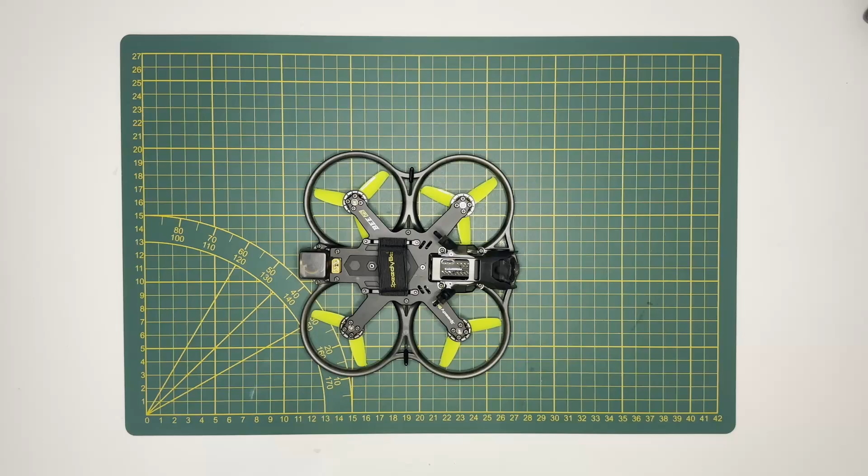Today we are looking at the Bee25 Frame Pro Kit from SpeedyBee. So let us have a look at their website. Here we can see the new Bee25 wireless tuning frame, and we have two versions, the standard version and the Pro version, and we are going to unbox the Pro version today.

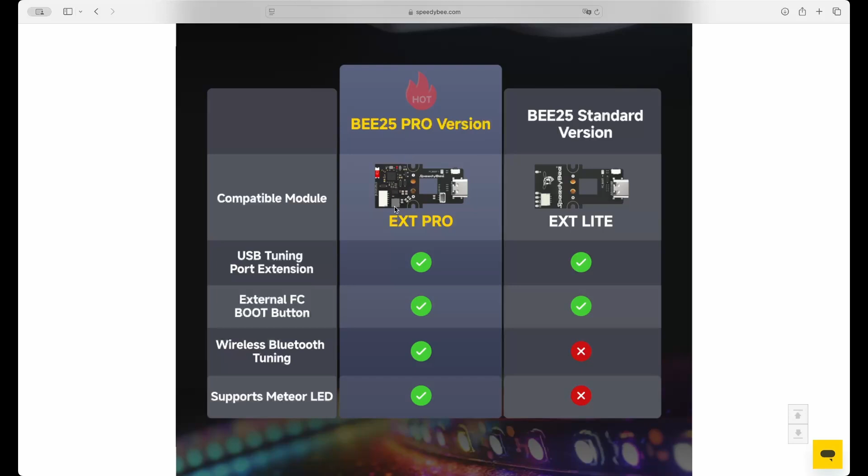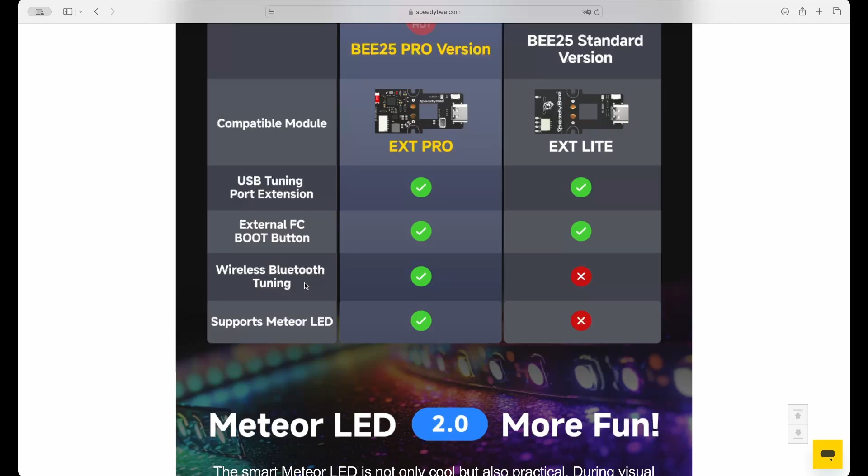As you can see, it is a 2.5-inch Cine Whoop, freestyle whoop I would say. The Pro version comes with these Pro extension boards where you can connect the Meteor LED, which comes also in the Pro set, and you have a Bluetooth chip so you can connect the app to the frame and pass through to the flight controller.

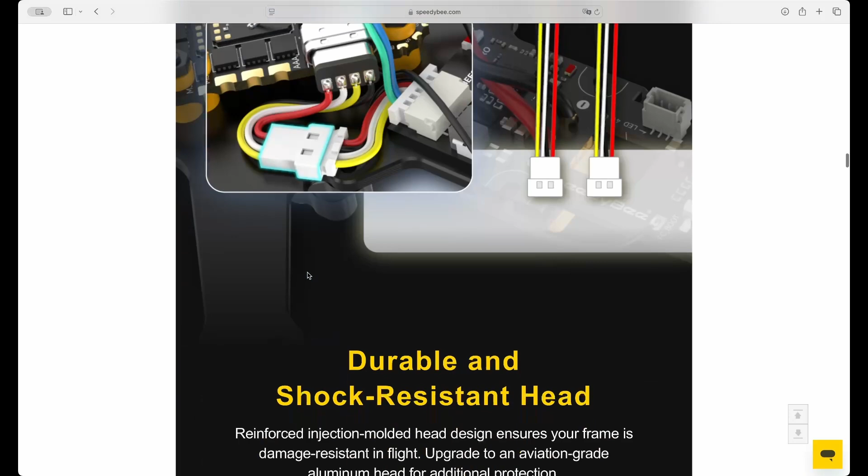As you can see, it is modular. You can use different camera systems, and it has an advanced airflow design, so your O3 air unit or Walksnail system will not get so hot.

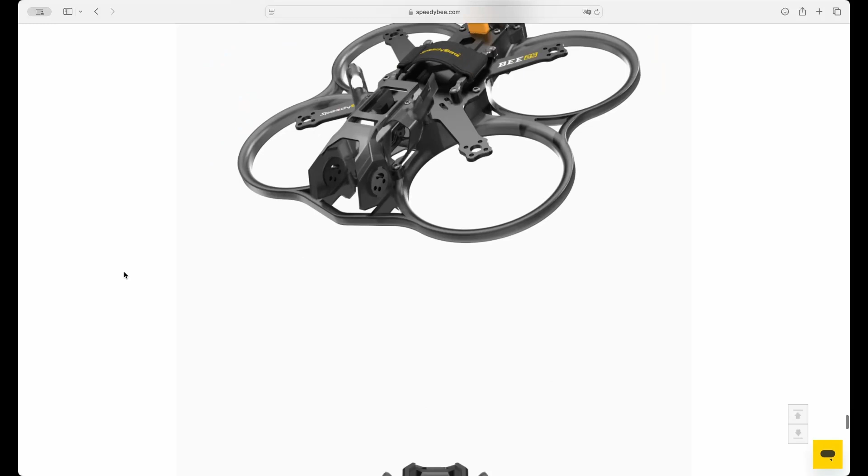We have the Bee25 frame kit, as well as our SpeedyBee F405 flight controller, a GPS with compass which we will put in the frame, 4 motors, and the TBS Crossfire Nano RX for controlling. Let's start with the motors.

We have the SpeedyBee 1404 motors, perfect fit for a 2.5-inch drone. They come with a bag of screws for mounting the props and the motors. The motors have an approximately 10 centimeter long cable, and they are made out of airplane grade aluminium. As you can see, quite small but very powerful.

Let's look at the SpeedyBee F405 AIO 40 amp. This is a new flight controller from SpeedyBee. It is equipped with an inbuilt ESC. It comes with a very good manual in Chinese and English. It tells you where to connect all your sensors and components and how to set them up in Betaflight or iNav.

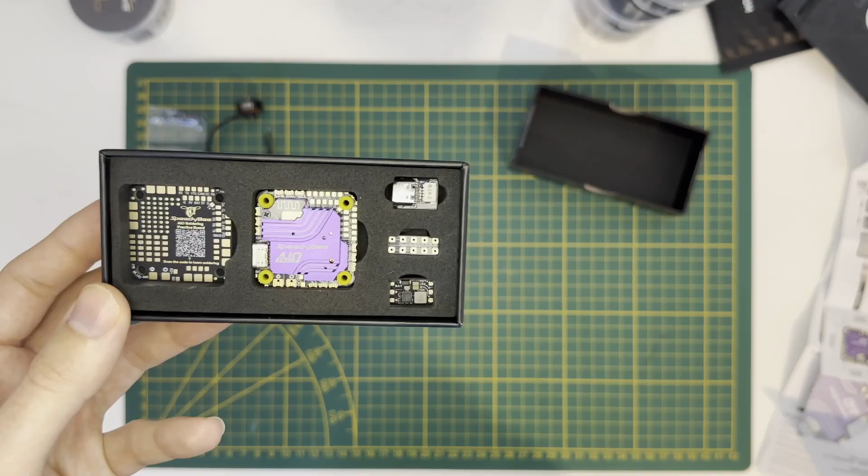Let's look at the flight controller. Here you can see the flight controller with a nice aluminium cooling plate on top and bottom. It also comes with a soldering practice board if you're new to soldering small solder pads.

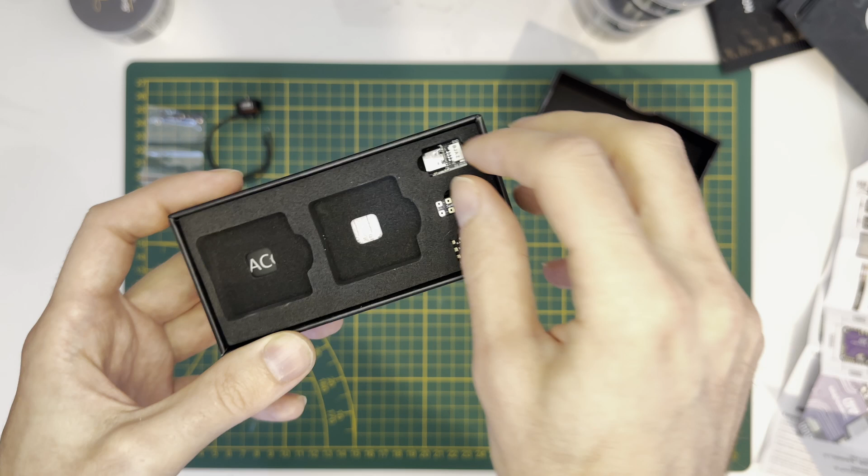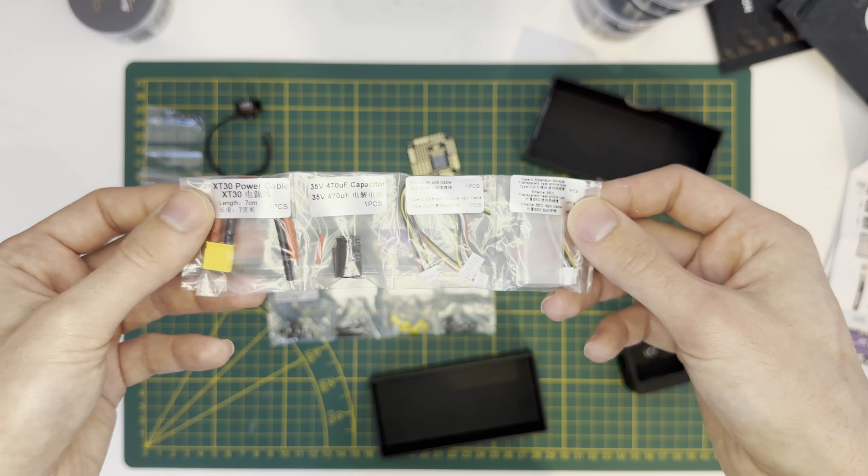It comes with a USB Type-C extension module. You can connect it to the flight controller. It comes also with a power expansion board to control more power to devices. And it also comes with a small BEC. So there you can see all the screws and nuts to mount the flight controller to a frame. It comes with all the necessary cables and a small capacitor.

Here we have the Bee25 Pro frame kit. This is the QR code to the manual. There you can see the frame itself. It is a carbon fiber frame. This is the injection molding head for mounting the camera. This is the mounting for the receiver. Some bits and pieces for the antennas of the camera.

This is the Meteor LED strip included. This is the Pro extension board. Here we have some tools. GPS cover, battery strap, and the protective ring. So these are all the pieces we need to build our Bee25 drone.

I'm very excited. I have not filmed the whole build process, but I will walk you through the manual and show you some photos of the steps I made.

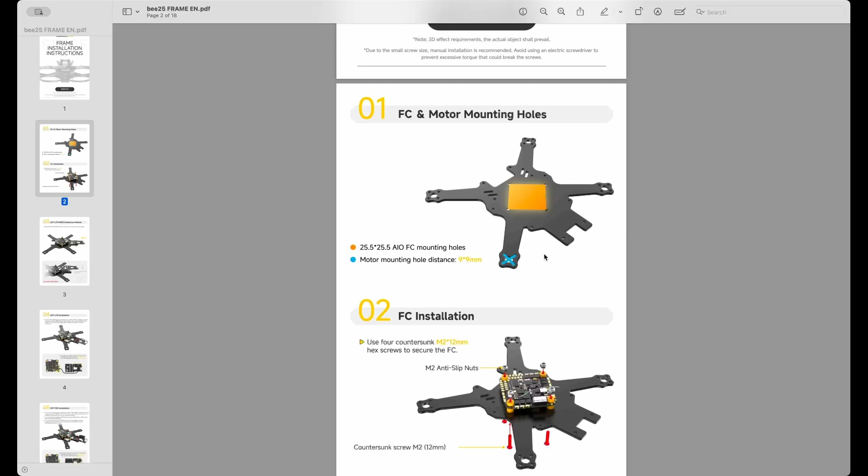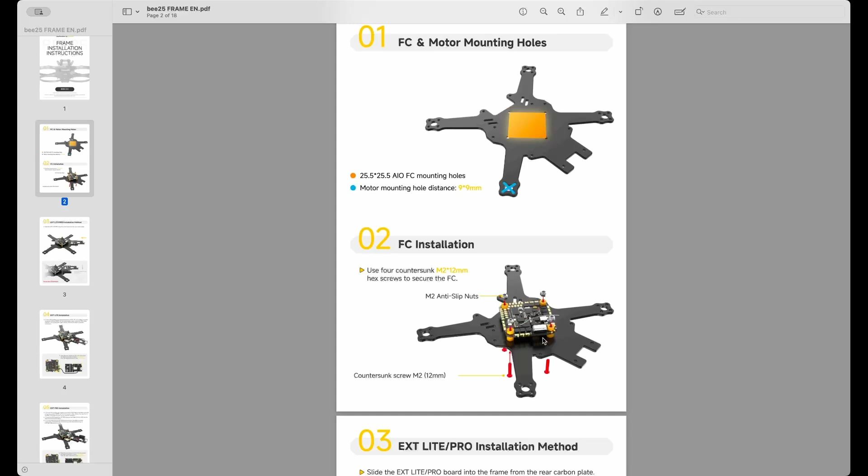Of the Bee25 frame. First you need to orientate your carbon plate like this, and then you can install your flight controller shown like this. So the USB Type-C port should be facing towards us. You can use the 12mm M2 screws and the M2 anti-slip nuts to secure it in place.

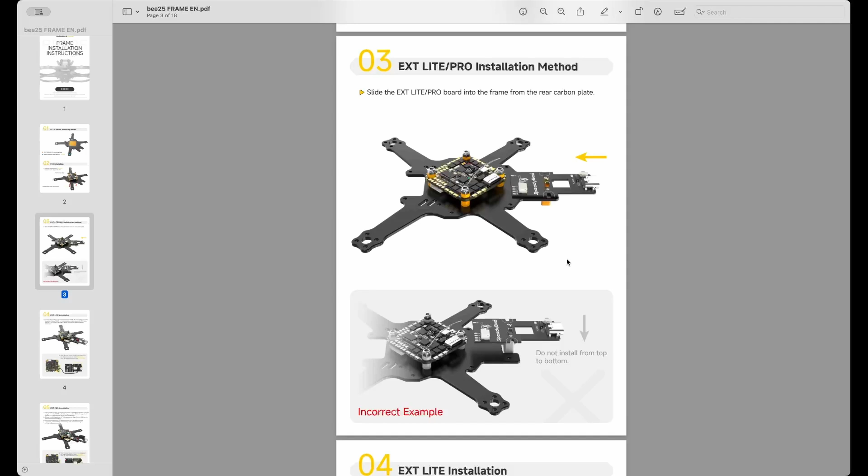Now you can install the extension board. It is very important that you slide it in from the side and not push it in from the top, so you won't break the connector. Now you can install the wires. You solder the power wires to the flight controller and to the extension board. You also plug in the USB Type-C extension and plug it in the port on the extension board.

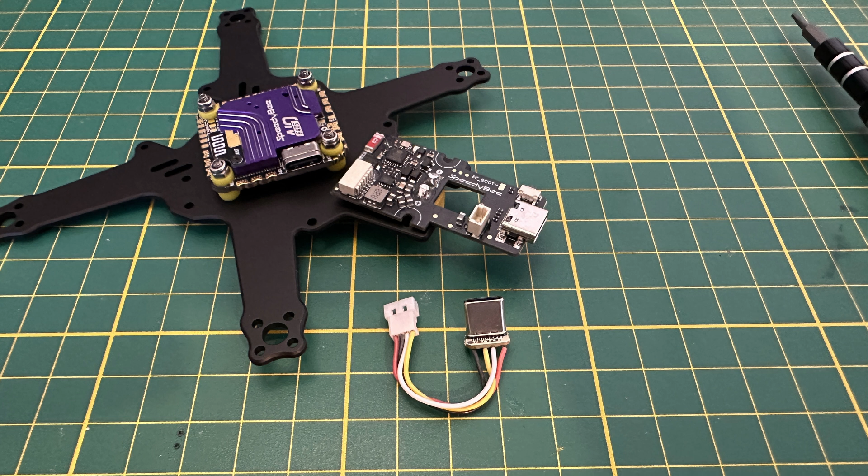If you have the Pro version, you can install the Pro extension board just like the other one. You slide it in from the side. You solder on the power wires to the flight controller and the extension board, as well as the capacitor. Now you plug in the USB Type-C extension cable to the port on the extension board.

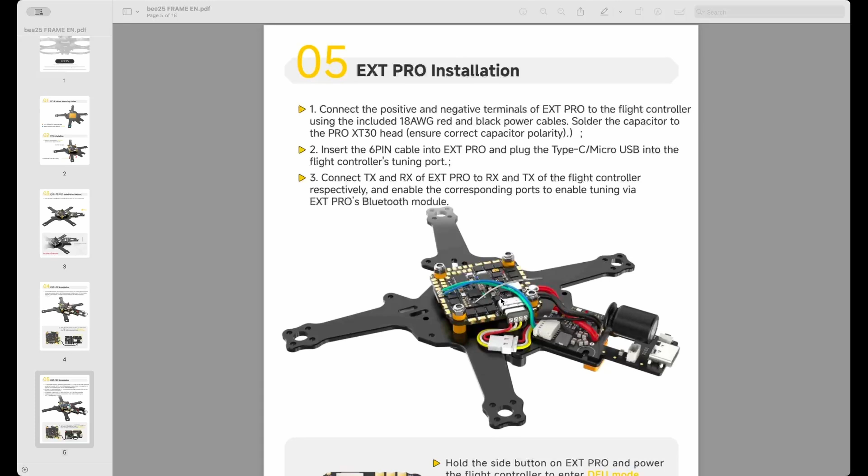2 wires will be left over, which you can solder on the flight controller to a free UART, so you can connect the Bluetooth app to the frame extension board, which will then connect to the flight controller. This is especially handy if you don't have a Bluetooth module in your flight controller.

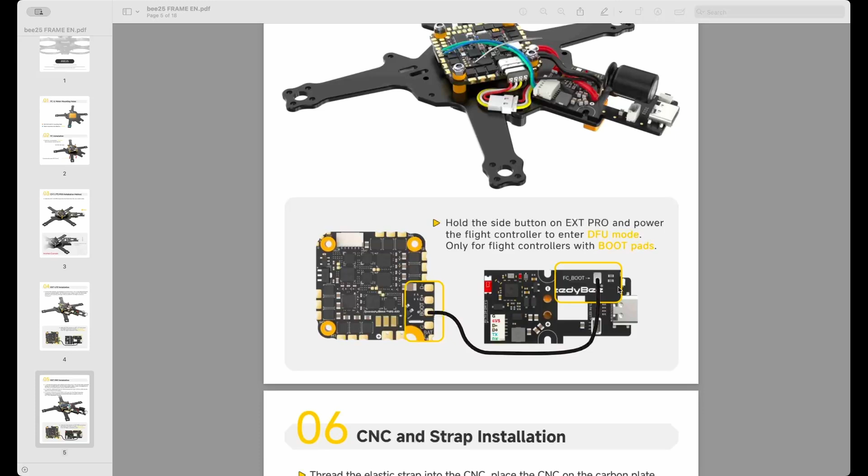If you want, you can also connect the boot pin on your flight controller to the boot solder pad on your extension board. So if you press the boot button on the extension board, it will boot the flight controller in DFU mode. Next, you install the CNC bars on the other side of the carbon plate and put in the battery strap.

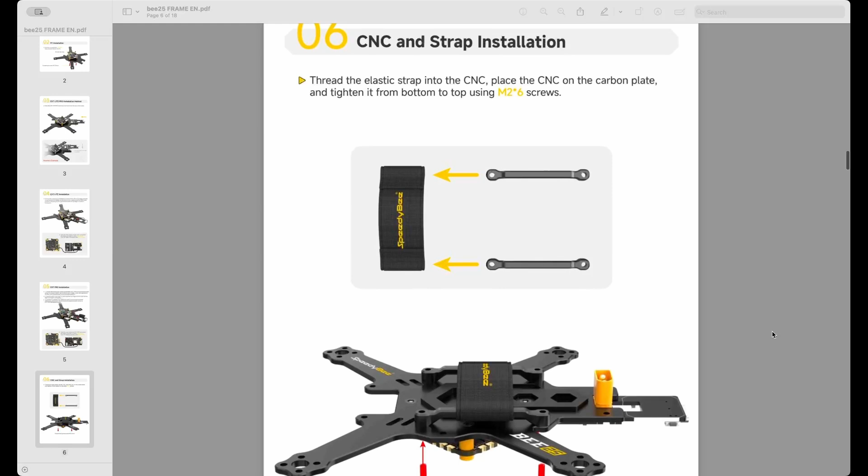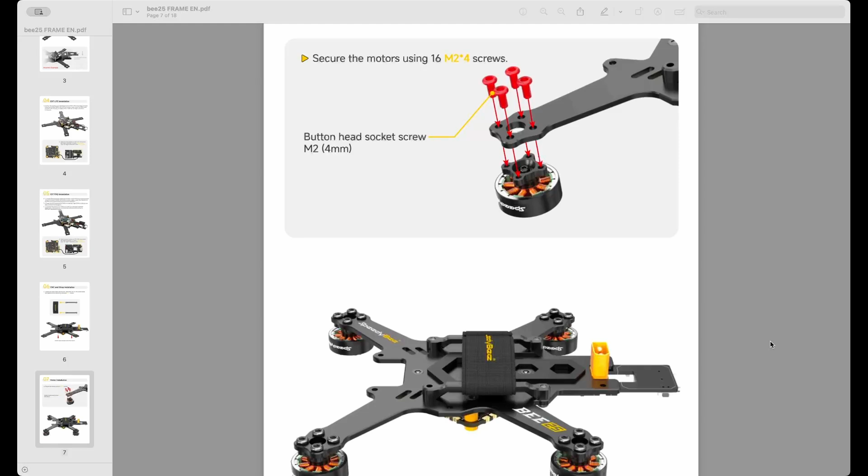Now we can install the motors. We secure them with the 4mm M2 screws and solder the wires on the flight controller. Next, we install our Meteor LED strip in the protective ring. It is very important that the small cable in the end will go through these holes here, so you can connect them to the extension board.

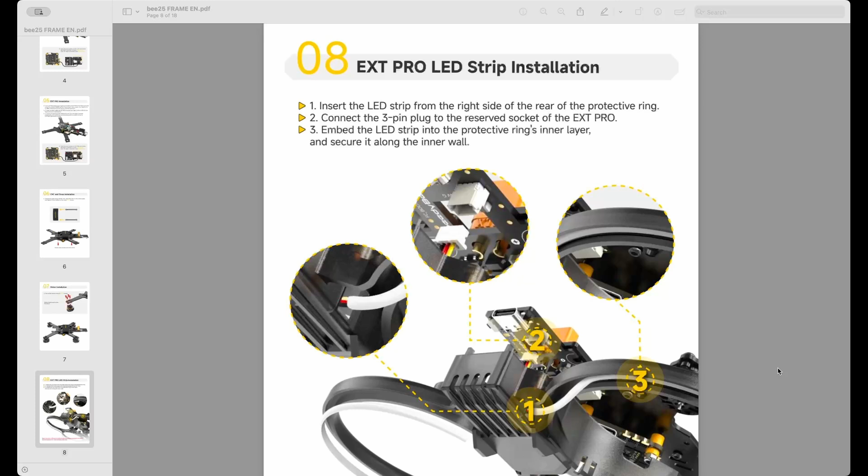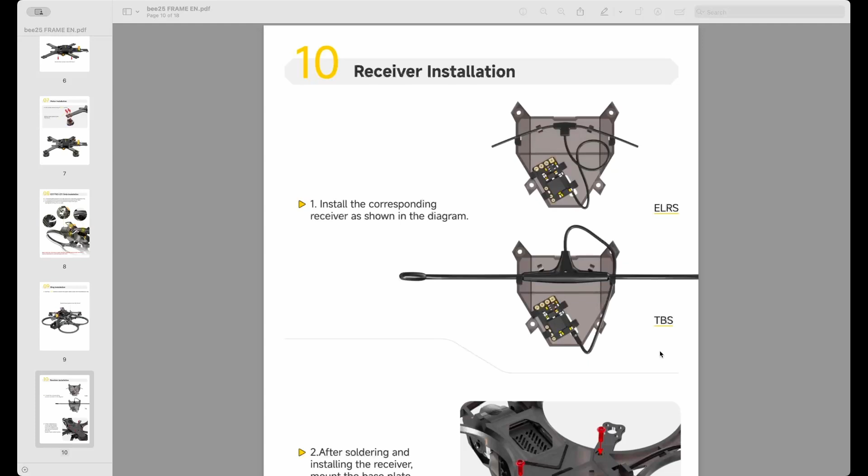You could install the carbon plate with the flight controller and the motors right now, but what I did, I soldered on a wire for the GPS module and also a wire for the receiver. Next, we can install the receiver. I use the TBS version, so it's really easy. You just solder on the wires to your receiver and put the receiver in these plastic clips here. Then you can feed the antenna around and put the antenna in the brackets.

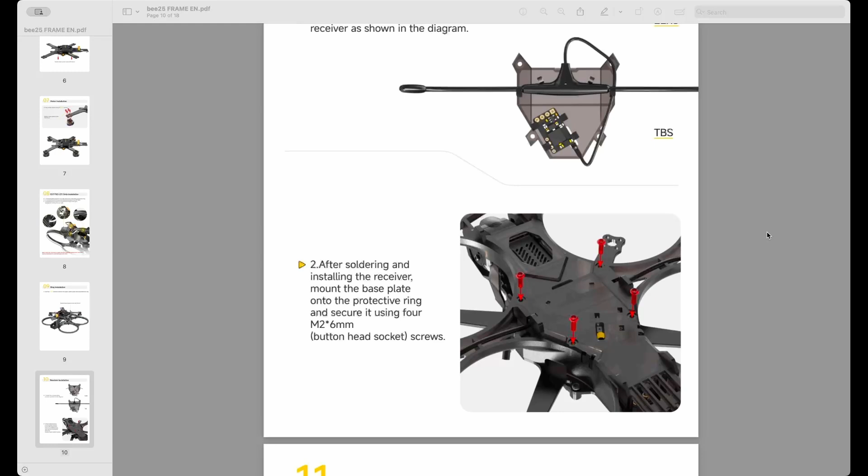The next step is to use this receiver plate and put it in the frame on the other side and screw it tight. Because I pre-soldered a wire for the GPS, I will feed the wire through this hole here in the back. Now we can put in the GPS module and screw the cover on.

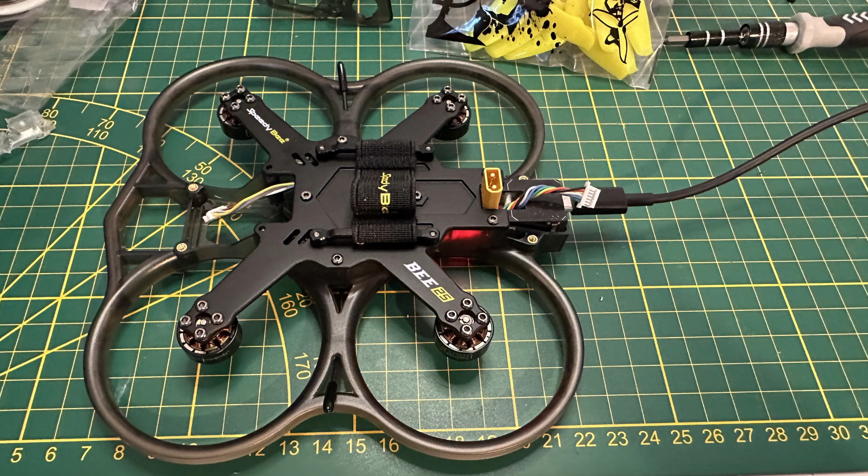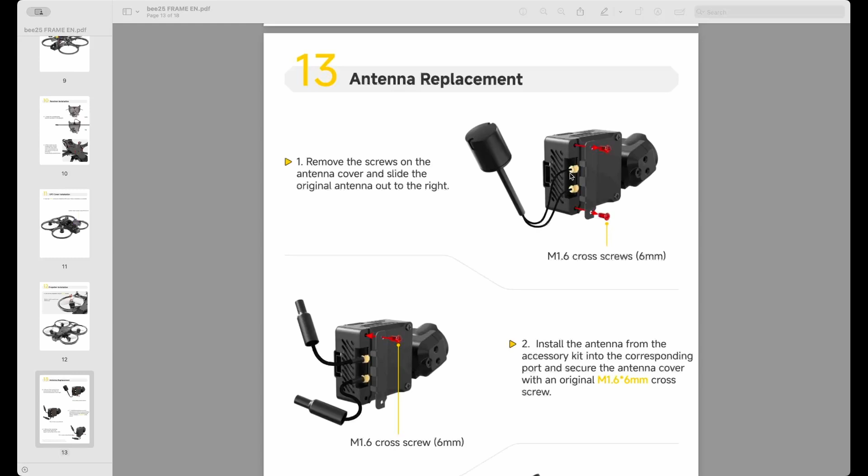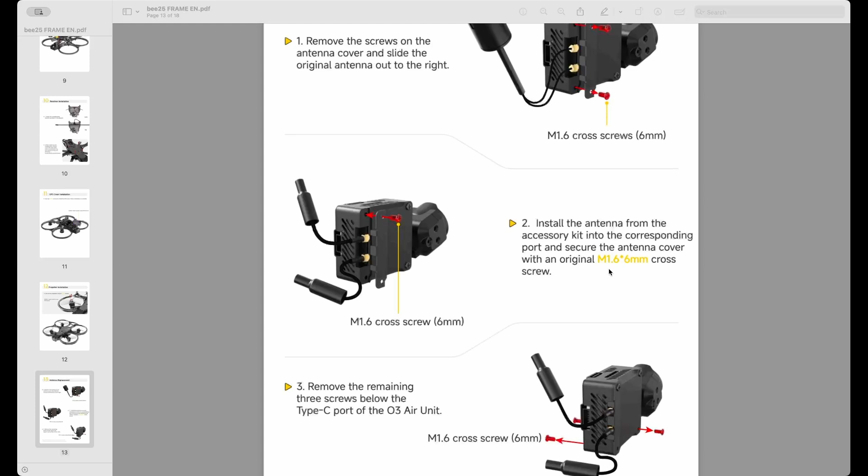Now this is an important bit, so we are going to install the DJI O3 Air unit. First you need to unscrew this bracket which holds the antennas and unfit the antenna connectors from the stock antenna. Then we put the antennas from SpeedyBee on the connector and screw only one screw back in, because we will screw the other screws in later. You also need to take out these screws shown in the graphic.

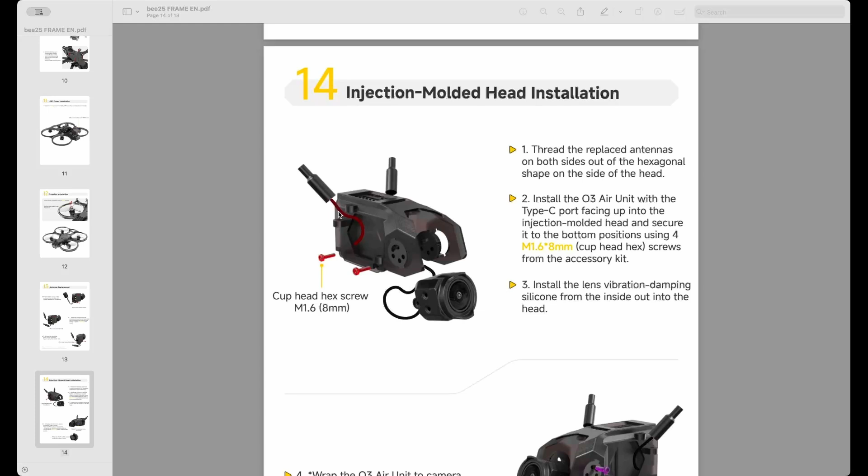Now you can slide in the O3 Air unit in the injection-molded head and feed the antennas around here, like you can see in the picture. You can wrap the cable from the camera around and put the camera inside the injection molded part. Then you put this little rubber piece on and then you can screw it in place.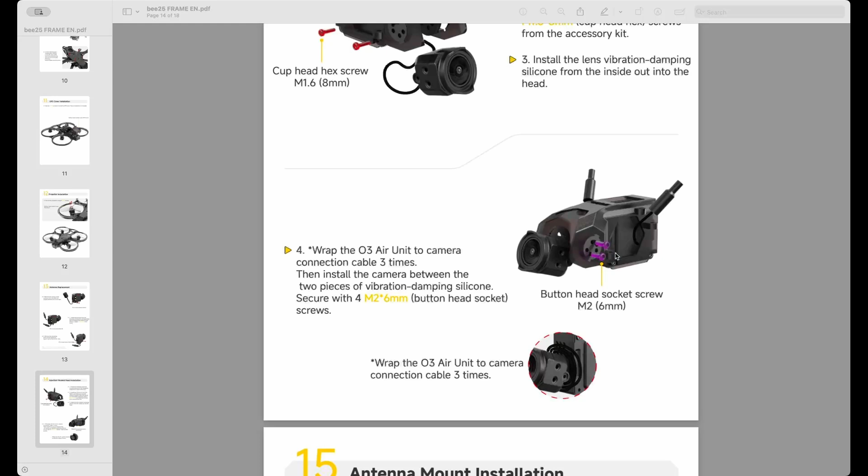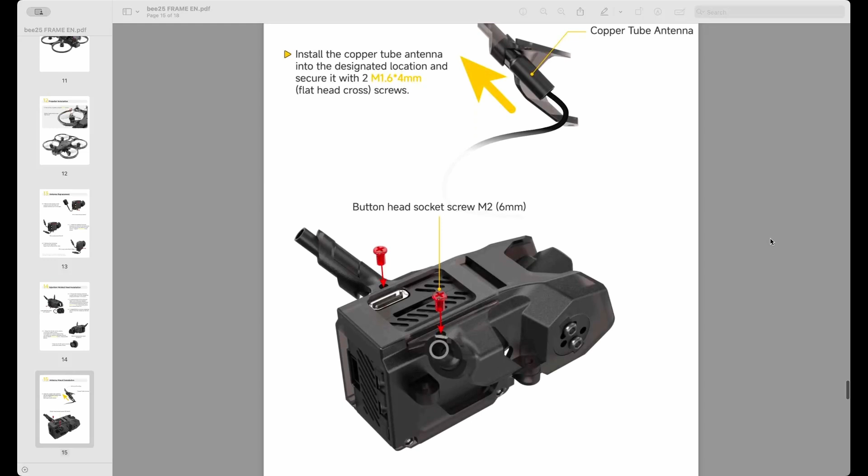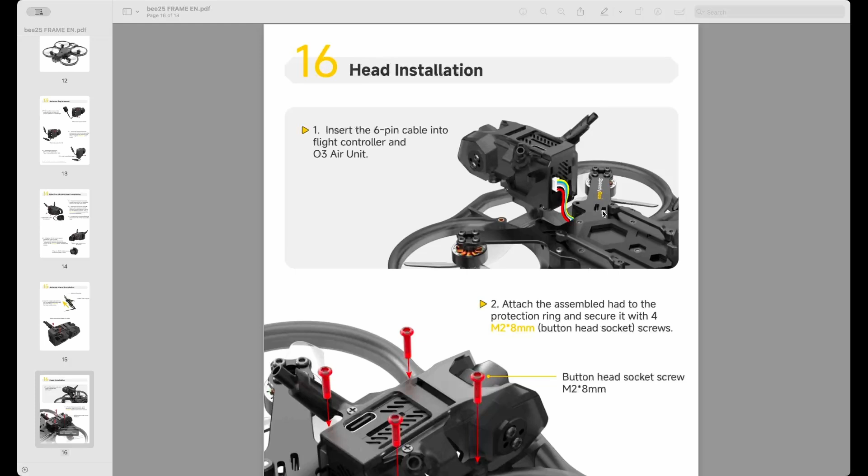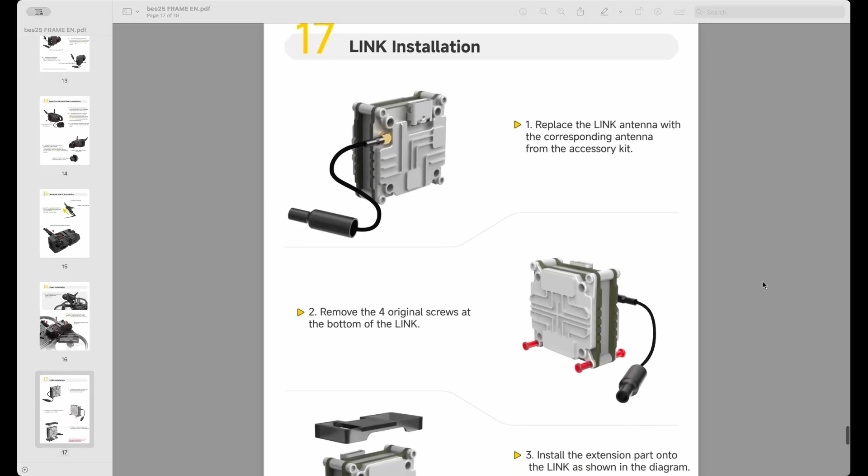You take these small antenna plastic mounts and push the antenna through, and then you secure them with one M2 screw from the top. Now you can connect the O3 cable to the O3 Air unit. You can now use the screws and screw the whole thing to the frame. And this is the instruction for a different module. If you are done, it should look something like this.

Now we can connect to Betaflight and start programming our flight controller. In the Betaflight configurator, we will make sure that our software on the flight controller is the newest one available. So we enable expert mode, choose our flight controller, which is the SpeedyBee F405 AIO. Then we can check, yes, we are already on the newest software, but we're gonna update it.

We make a full chip erase to delete all of our data and load the firmware online. Now we can flash the firmware. This will take a bit.

When the firmware update was successful, we can connect to our USB port. It gives us a warning that the accelerometer is not calibrated. Now we can see our drone is connected, but it is the wrong way around. So this is the first thing we will do.

We will go into the configuration tab and select the board and sensor alignment. This one will work on the counterclockwise 90-degree flip. We save and reboot. And now we can see that our drone is connected right, the rotation works. Next we can go into the ports tab.

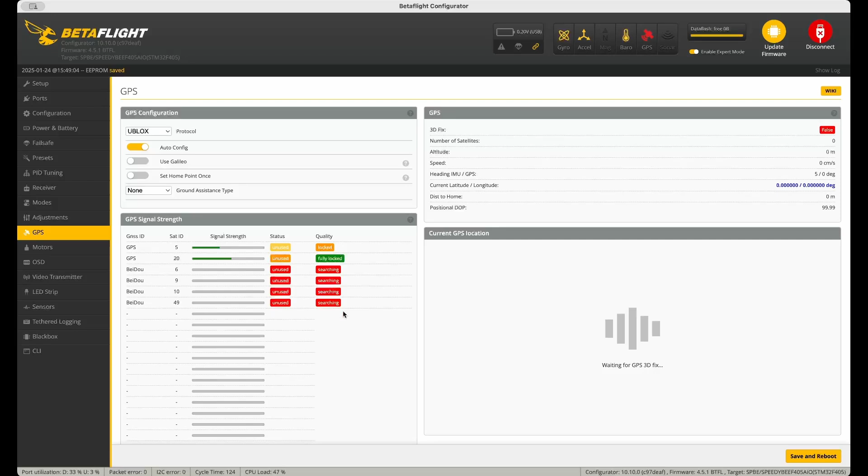When we connect the GPS, we can see in the GPS tab that we have a connection. It will probably not find many satellites indoors. Also note that the GPS module which I bought does not fit under the GPS cover. I just connected it to make sure it works. I have ordered a different GPS module which is much smaller and it should fit within the cover.

In the OSD tab, you can change the video format to HD and add your values like the artificial horizon, the compass bar or temperature sensors, which you can move. Note that if you make any changes, you need to save to make them work.

So this is my finished build of the Bee25 Pro frame. I really enjoyed building it. It's a really tough little frame and I will show you some video of me test flying it. Please excuse my bad flying, it was very cold on that day.